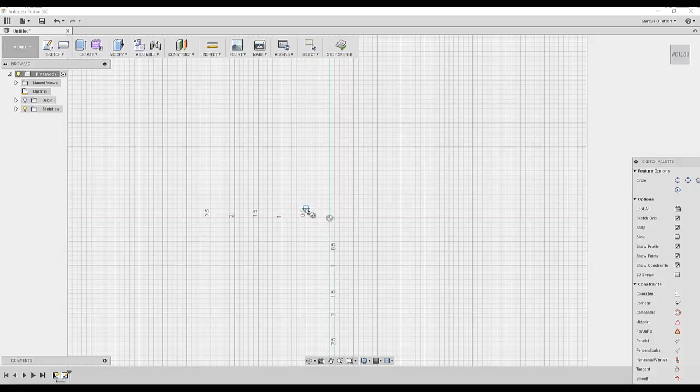Hi, in this tutorial we're going to make a single tooth disc in Fusion 360. First we're going to define the outside diameter. This can be anything you want it to be. Next we're going to define the inside diameter of the single tooth disc. Again, it can be anything you want it to be, depends on your robot design.

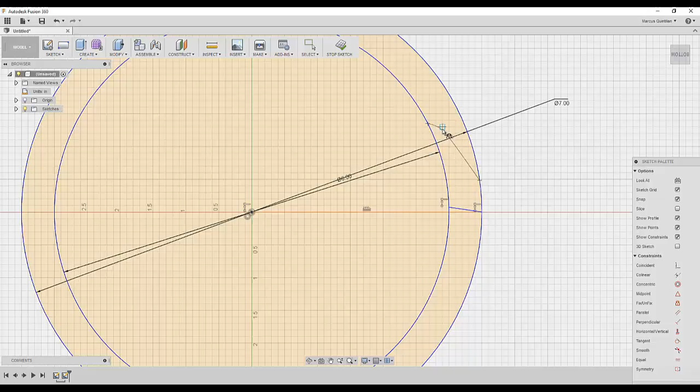Now I'm going to create a center line, just for reference. And then I'm going to design the tooth profile. This again can be anything you want it to be. Whatever looks strong is usually strong enough. I'm just using a conic curve to make the rounded edge. And I'm moving around until it looks right. But this can be whatever shape you please. It doesn't matter.

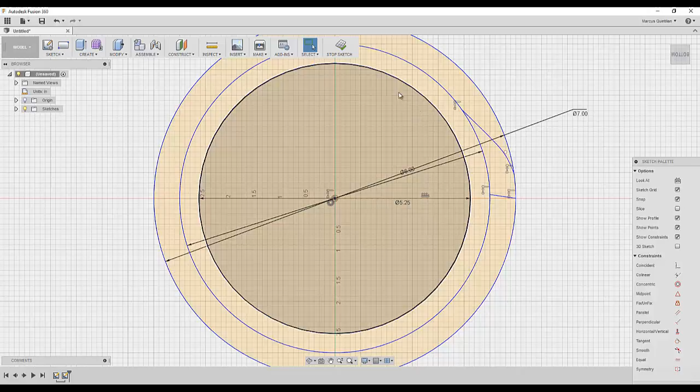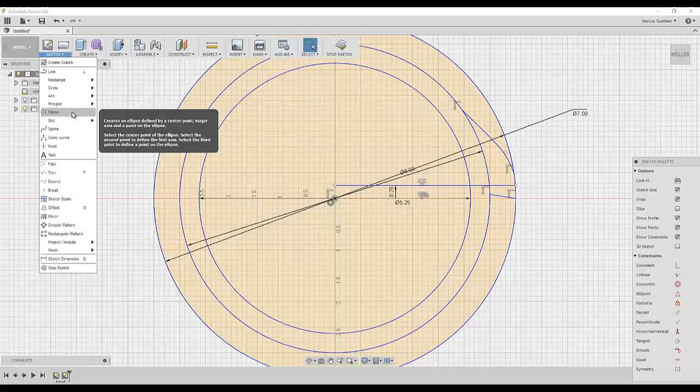Next, we're going to make a circle at the center to design the hub and spokes. This defines the thickness of the outside of the spinner. Now we're going to make the spokes. This again can be whatever you want it to be. I'm just using the offset tool to create a spoke.

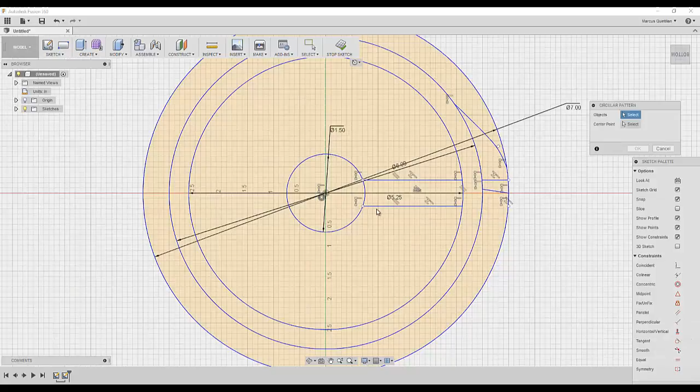Now I create a circle in the center to be the hub, and use the trim tool to remove the excess line. Now I use the circular pattern tool to create three spokes. You could create more. Again, it's up to you. And then a circle in the middle. You can change that one later.

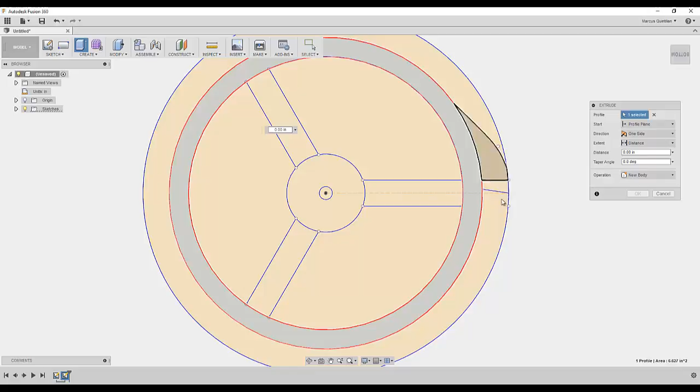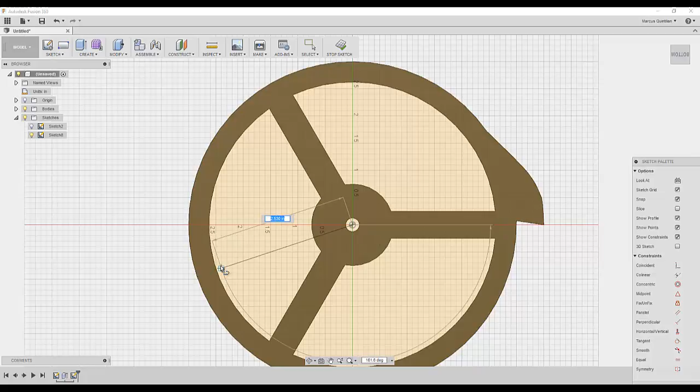Now we just extrude the single tooth disc out. And there we have our overall design for the single tooth disc. Now, how do we make it balanced? So first I'm going to create a line. This is going to be the mass that offsets the weight of the single tooth. Now I create an inner circle. This defines the inside of the mass.

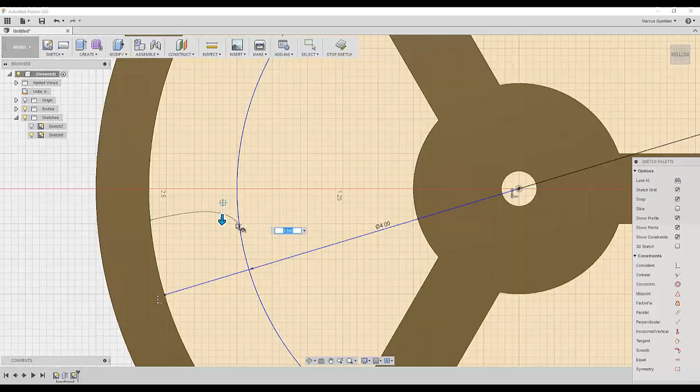Again, I'm going to use the conic curve to create the mass. This can be really anything you want it to be, as long as it's just an amount of mass that can be moved around within the circle and remain concentric. I'm just using the conic curve because I think it looks nice, but you could use an arc or whatever. It could be a square. I've seen people use cutouts. It just has to be a movable mass.

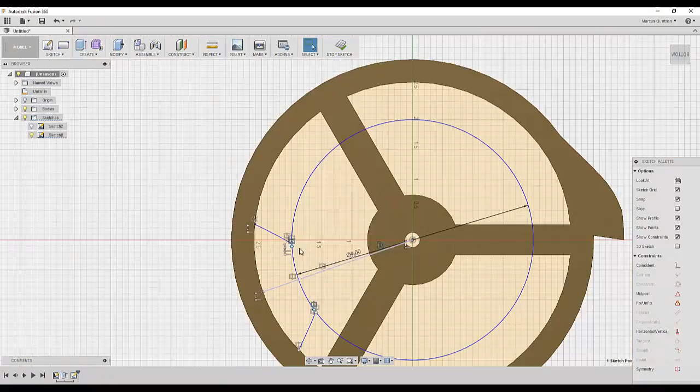It should be fairly large. You want it to be about the same weight as your tooth. A little bit heavier is what you're looking for, but you can just guess. Try what works. I'll show you how to adjust it later to balance the tooth. So you can see I can move it there. Now I extrude the mass out. Okay.

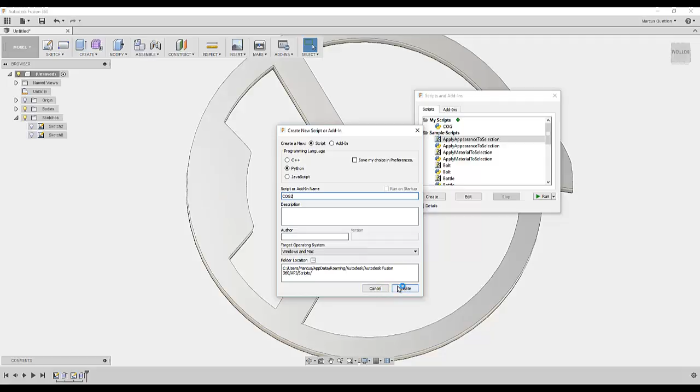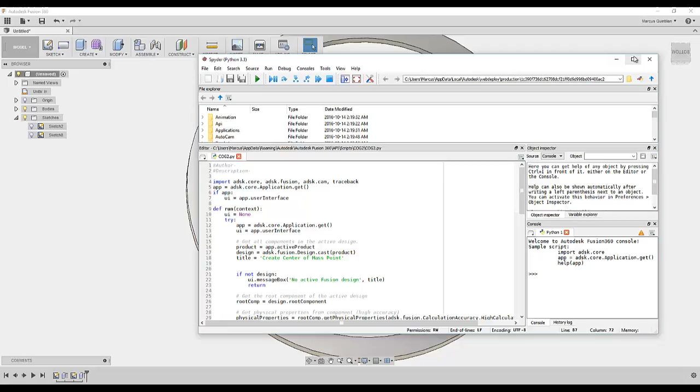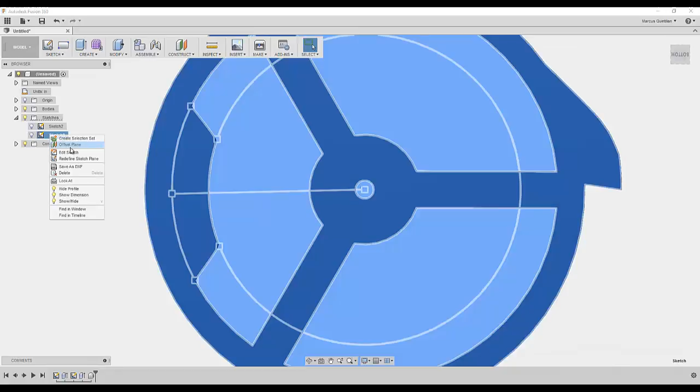So you can see we're already pretty close in the COG. It's just the mass is too far to one side, so I have to reduce the weight of the offset mass. Now we're going to rerun the COG script and see it gets a little closer to center. We want that to be directly in the center for a proper single tooth disc. So I'm going to reduce the weight of the mass further. Okay, so it's a little too far up, as you can see there. So I'm going to adjust the mass downwards.

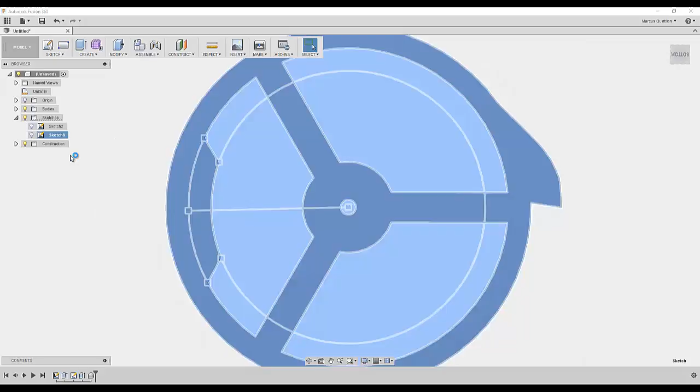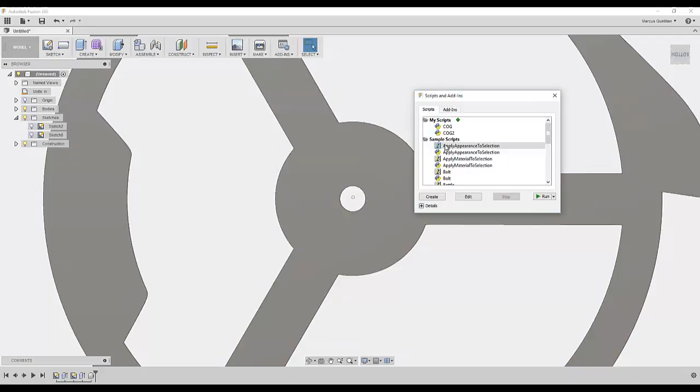This really doesn't take too long, but if you're doing it properly, you'll want to spend a bit of time doing this. For the purposes of this tutorial, I'm not going to get it exactly right, but it doesn't have to be perfect. The way you mount your single tooth disc will have a certain amount of tolerance to it. So a perfect centralized CG isn't necessary.

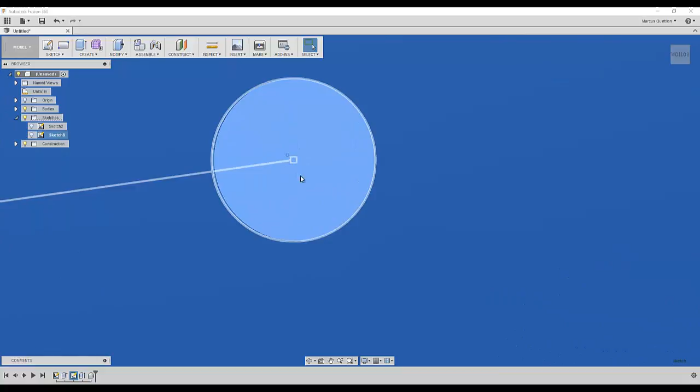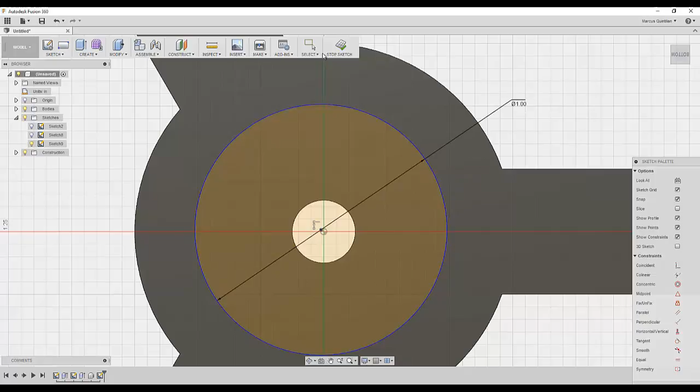So the CG is close enough for this tutorial, so I'm going to create a circle, and this will pilot onto the hub. Now this would actually be a balanced disc, but the circle isn't concentric with the outside hub circle I made. If your disc is balanced correctly, it should be close enough that it won't be visible. Okay, there we have it. Single tooth disc.